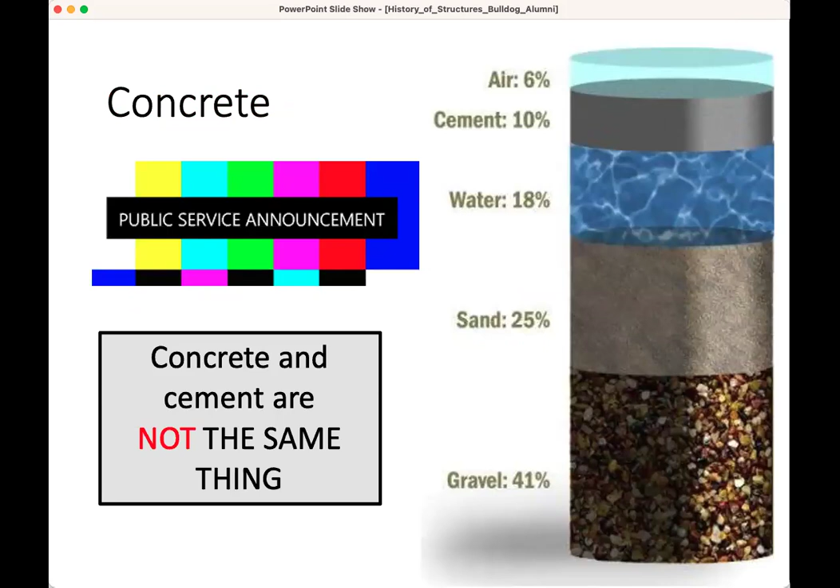So it's very important that you leave today with that fourth objective taken care of. Concrete's the hard stuff and cement's the powder. So there's not a cement sidewalk, there's a concrete sidewalk. There's a concrete slab in your basement, it's not cement. It's similar to how a cake is not just flour. So keep that one in mind and spread the word for me so I can continue on my mission with this differentiator.

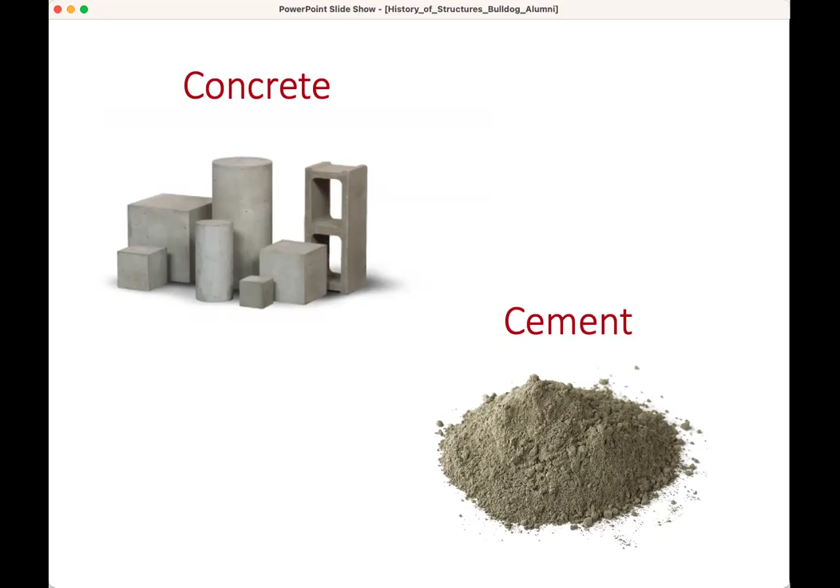So for this course, if I look at the course description in the catalog, I'll point out a few keywords: we look at structures of historical significance over a long time frame. But what's unique here is that we look at the social and economic importance, the societal impacts, and the merits of the engineering design.

I spend a bunch of the course talking about the actual structural engineers who designed and, in many cases, supervised the construction of these unique structures. Regardless of your background, you learn some basics about how load is transferred in a structure—how does the load from the cars on the bridge get down into the ground? What is that flow of forces?

Now, it's qualitative, so we don't go through a lot of numbers in this course. It's really a conceptual type of course.

And we look through many of the contemporary structural designers as well. You'd recognize some of these names, such as Eiffel, who actually did a lot of bridges before doing the Eiffel Tower. Eads, Ammann, Maillart—you may not know so many of those. But this takes us all throughout time.

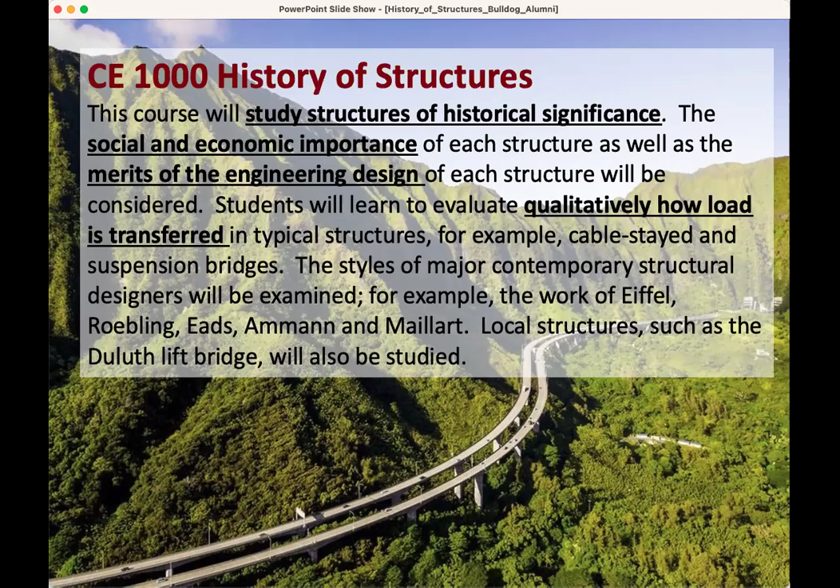But we also end up talking about some Duluth structures at the very end of the course. This course is a 1,000 level course, which means there are no prerequisites, and it's intended to be a first level course.

It's part of the liberal education curriculum, which is a little bit unusual for an engineering course. It has engineering as its backdrop and it's kind of at the core, but at the same time it contributes to the humanities and global perspectives category of liberal education.

So the humanities part is looking at the social component, the historical component, and then I jump back and forth, but start overseas in Europe. And as we develop the different structures, we move across the globe. Because we're looking at those perspectives in a global sense, it also covers the global perspectives curriculum.

This is a massive course. It's asynchronous, which just means it's go at your own pace to some extent, but we don't have live lectures. We have recorded videos, kind of like what we're doing today, that you can do at your own time. That's the asynchronous online part.

The last couple times I've taught it, I've had over 600 students from all kinds of backgrounds. The students who've had me for a class other than this one know that I tend to be really into giving you case studies and stories on the spot, so the distinct organization and rigidity of how I lay this course out is a little different than what I'm used to.

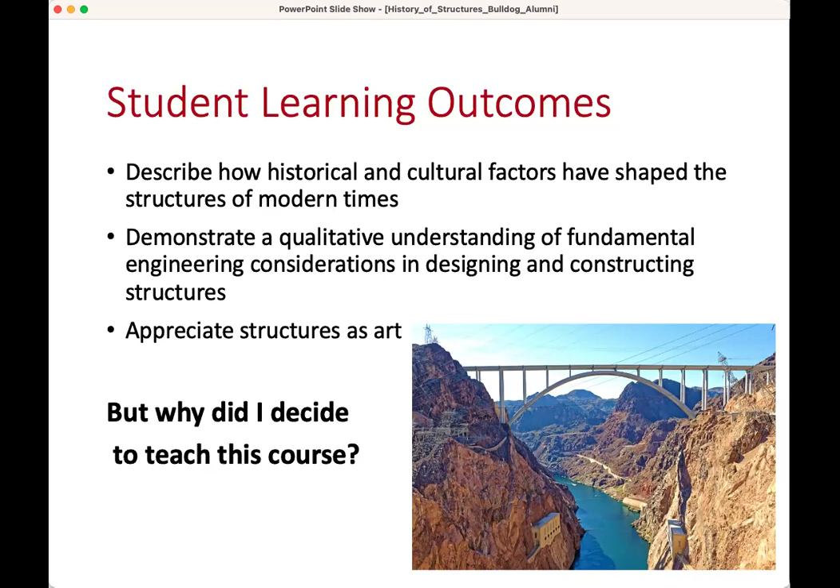And then I also was lucky to experience the person who kind of started this discussion around structural art. That's David Billington, who has passed away, but he was a professor at Princeton University. He was an engineer, but he was also fascinated by architects and architecture as well.

I was fortunate enough to be organizing a conference where he was a keynote speaker, and I had to help him set up. This was in the days of slides. He wanted 3 screens going, and he had a big long pointer stick and would smack that.

I mean, it was a stage show, and it was so exciting. It was like the dinner presentation, so it was a mixture of engineers and other audience members who weren't engineers, families and things like that. And it was just captivating.

I really wanted, first of all, to be able to do what he did as far as teaching, but I also wanted to be able to spread knowledge the way he did.

So his format has been carried on by Professor Garlock at Princeton, but in a little different way. I've developed this using some materials from David Billington and Maria Garlock, as they did an NSF project that allowed some of this to be shared. But then I've developed it quite a bit differently, based on structural engineering specifically.

I also happen to know David's daughter. She was a classmate of mine when I was a PhD student. So lots of really cool connections, and I'm honored to be able to carry on this tradition.

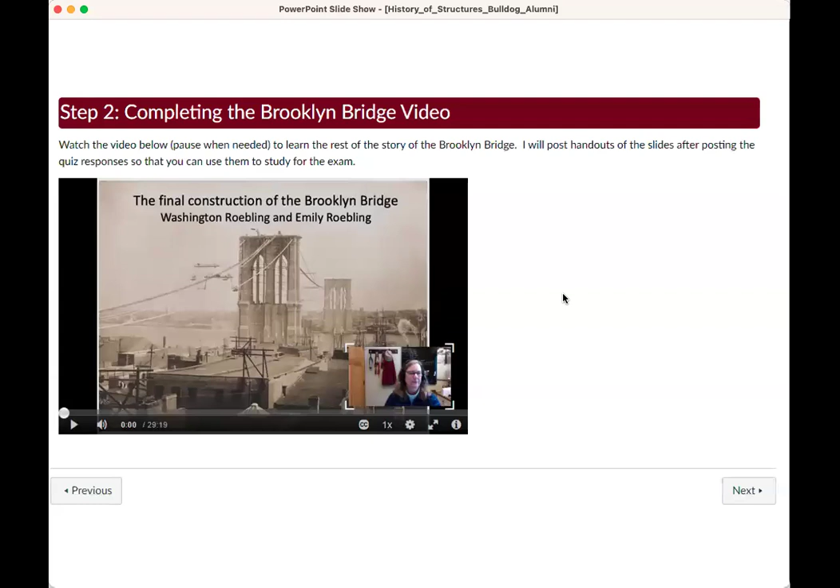You go in from there, and I'll talk to you about how I do my grading in this course right after this, but you have a kind of low stakes quiz that just tests that you watched the video and moved forward, and that you feel comfortable whether you need to go back again and see that you got all the details or not.

So, basic questions: who contributed to the design of the Brooklyn Bridge? If you've watched the video, you should have picked that up. The answer is John Roebling, Washington, and Emily Roebling. John Roebling is the one often credited, but he actually died before the bridge was completed, and his son Washington and his wife Emily had major parts in this.

Washington also was not able to go to the site after a while. Emily, and this is in the late 1800s, was on site with the construction crew many days, bringing information back and talking to Washington, who was also an engineer. John died from tetanus. He was on site with Washington one day, they were on a dock, and a boat crushed his toe; he had it amputated and then eventually died of tetanus.

So Emily actually did a lot of the work on this bridge, making it happen. Going down to the construction site in the 1880s as Emily Roebling is a huge deal - that was still a huge deal when I was in school, to be honest. This is part of this really cool people story behind the Brooklyn Bridge, as well as talking about what that did for New York City, what the landscape looked like at the time.

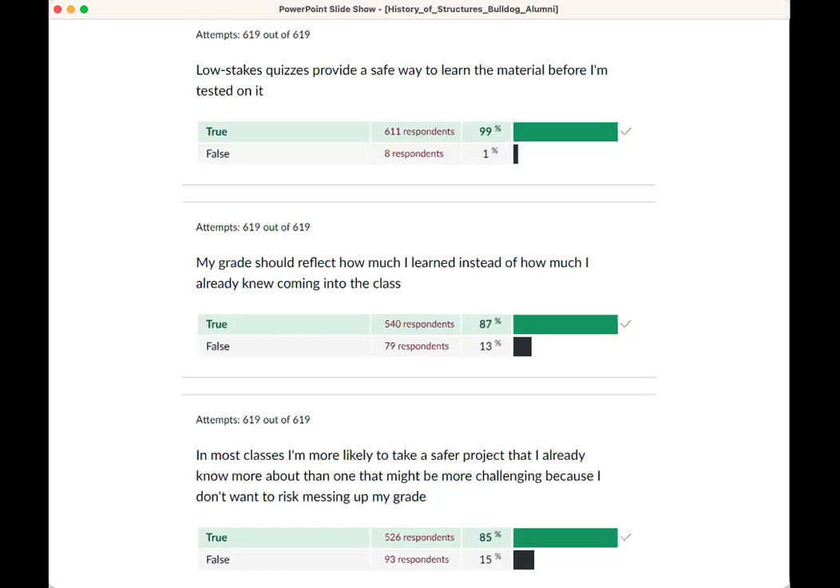This is an overall survey I don't prep them for. They take it at the end along with their teaching surveys, and I just ask what they think of this method. You can be pessimistic and say they just like it because if they do all the work they get a decent grade, but they actually have to learn the material to do well on the summative pieces. You were able to take these quizzes many times.

99% of the class said this was a low stress way for me to learn and reinforce the material that was important. I learned more this way than if I'd been focused on high stakes quizzes with one try. I worry less about the background that others have coming into the class. So it's kind of an interesting sample.

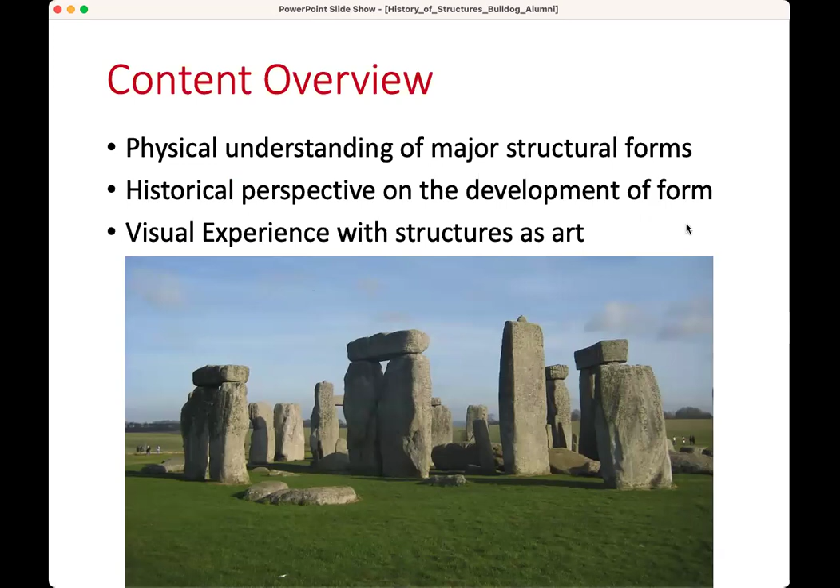Let's talk about the content of this course. It's designed so we go through physical understanding of the big structural forms, a historical perspective on how we got there, and then a visual experience with structures as art. This is Stonehenge.

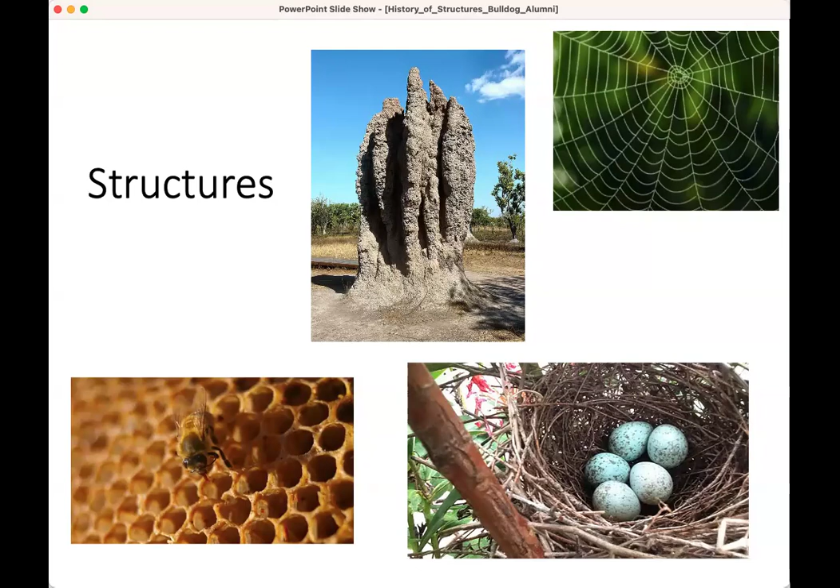We have structures in nature that we replicate - you can see the honeycomb pattern and various structures, some very intricate. Then we have man-made structures, sometimes based on those types of things. I'm not going to go through and tell you what all these are - if you're in the class, you'll see each of these and we'll talk about them.

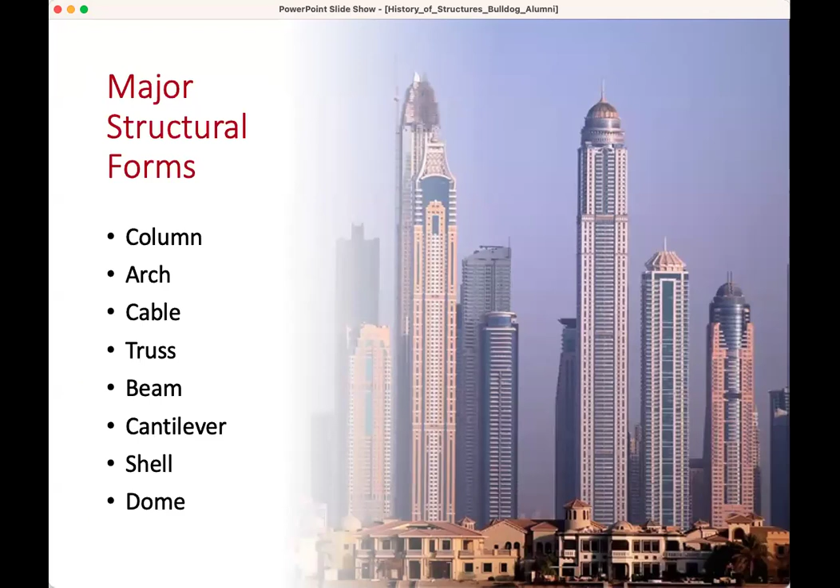We talk about major structural forms, everything from columns and arches and trusses to shells and domes. I'm just going to flick through a couple of these. In the course, we spend time going through these structural forms, and I'll show them in order of how complex they are.

Cables are the opposite - they take all tension, all pull. They're very effective by pulling; try to compress a cable and it turns into a wet noodle basically. The top image is a suspension bridge, bottom left is a cable stayed bridge, bottom right is a ribbon structure - might be scary for those who don't like heights. They're all based on these big tension carrying members, whether that's the big suspension cable, the direct cables to the roadway, or the ribbon holding up this reverse arch looking structure in tension.

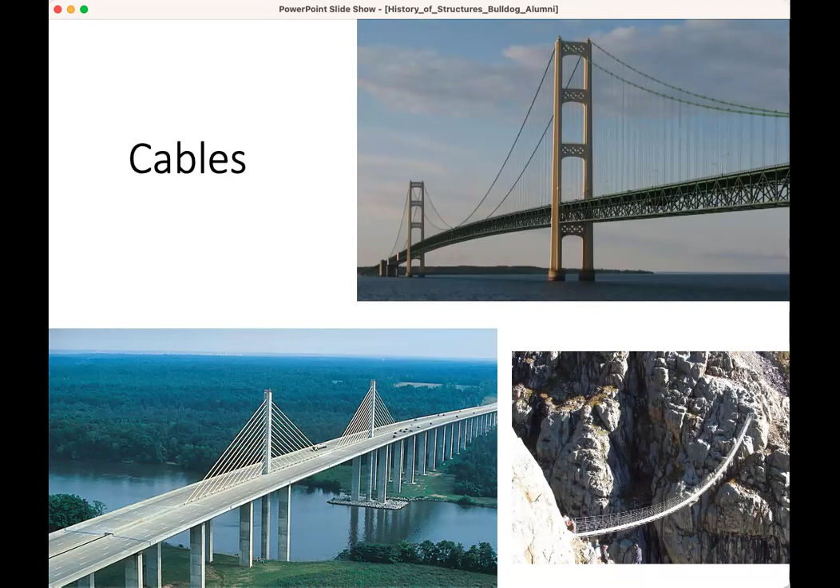Trusses are the next step. No matter how complex, something like a cable-stay bridge or suspension bridge looks, if I'm looking at the primary tension component, that cable part is simple because it's just tension. Trusses are made up of tension and compression members, some of each, and they work together to take bending.

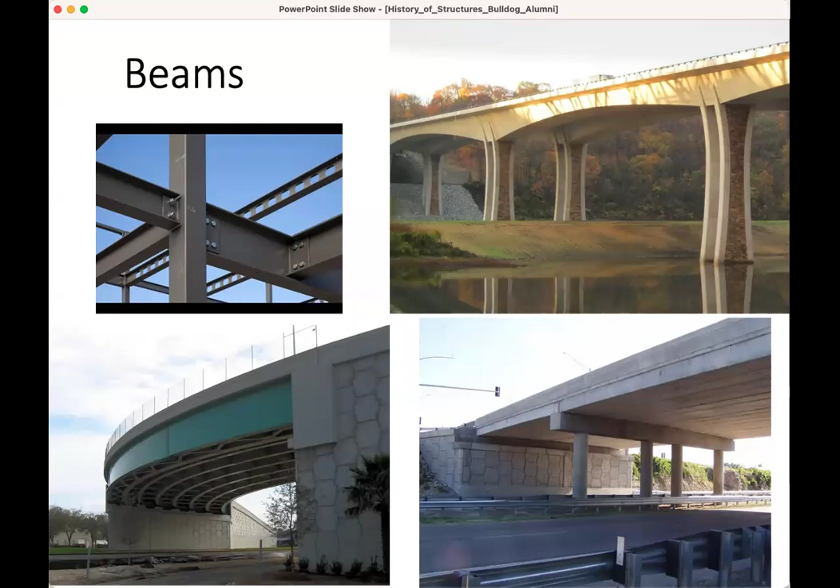Beams are more complex because they take all those different things, including flexure or bending. There's all different kinds of beams. Cantilevers, in other words diving boards, are a specific type of beam where we've got tension on the top, compression on the bottom, and it's a favorite of architects.

Shells are very complex, so they kind of work with a whole membrane. These shells are all concrete, very thin concrete shells, so really amazing what can be done here.

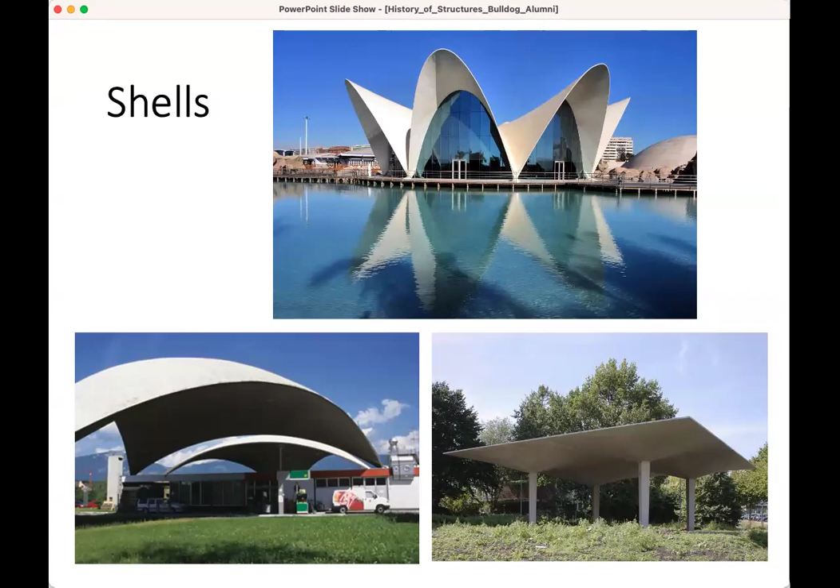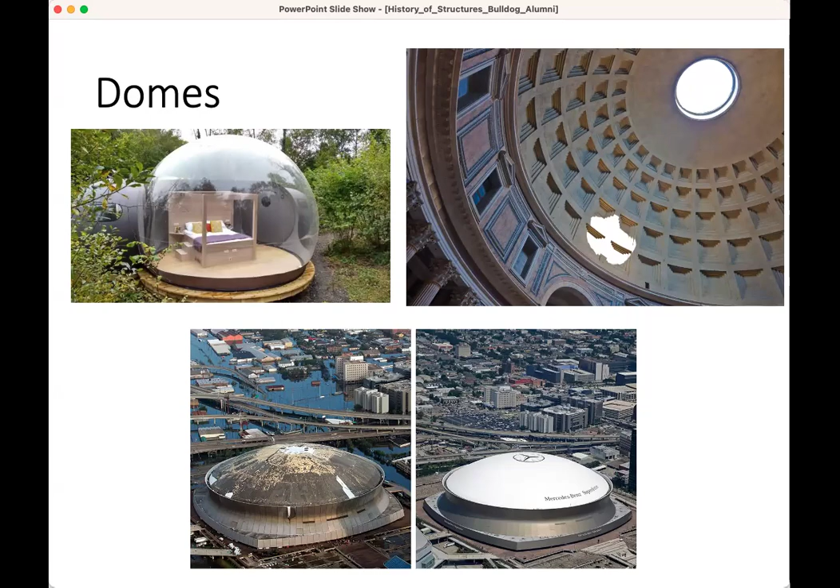Domes are a specialized version, so the Pantheon, upper right. The Superdome, of course, I talk with the students about—the Superdome on the left is after Hurricane Katrina.

So we got the structural piece. We also have the materials piece. And what I do in this class is walk through time. I go from Stonehenge, quickly move into a discussion on timber and stone, quickly into iron.

And then we start looking at the more modern evolution. So we're following time, jumping at different spots around the world, and developing our different structural shapes by touching on key structures. Maybe not the most famous—we have plenty of famous ones—but these are ones that have a story to tell about the person who designed them, the time period, the location, and the societal impact.

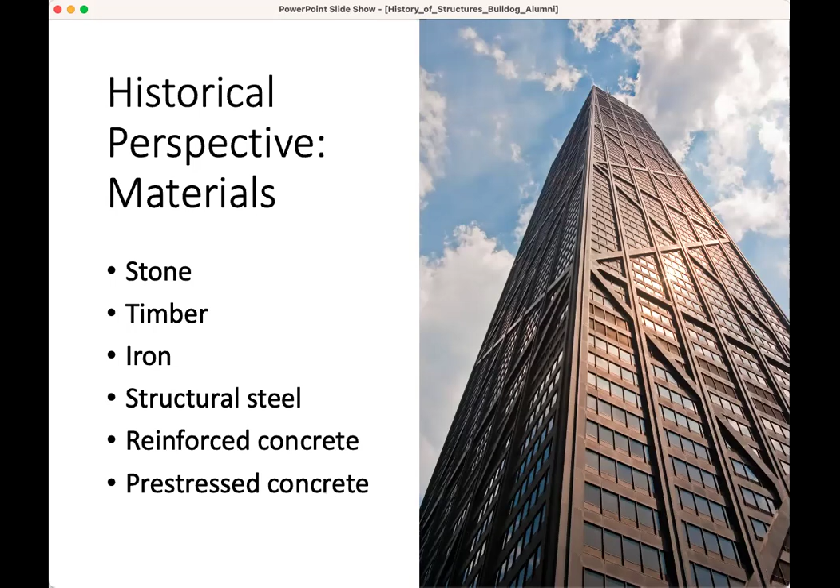And so as I move through time, I have these materials developing, I have the structural forms developing based on what the materials can handle, and I start to see a great evolution here.

For instance, we start out just past the Industrial Revolution. I used to be using stone and wood. Now, all of a sudden, I have iron. Iron as a metal is a game changer for what I can do with my structures and how big I can span. Stonehenge doesn't span very far. Some of the iron structures do.

I have a change in power source from animals and humans to steam engine, so I've also got bigger load demands for bridges and things like this. I start to open up my experience—I'm not just looking at a mile around where I live, I'm starting to connect cities at this point.

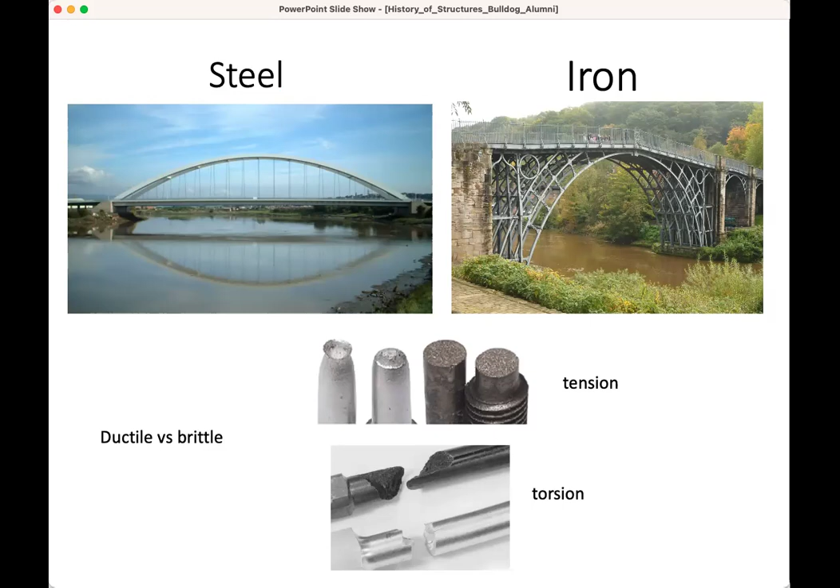I go from iron to steel, which is an alloy, and I start to get properties like more ductility, more ability to stretch and be flexible and not fail instantaneously. Some really important properties. I start to put steel inside of concrete so that it takes both tension and compression well.

I then start to use the steel almost like a steel rubber band—it actively compresses the concrete and I get longer and longer spans. This is my specialty area, in pre-stressed concrete.

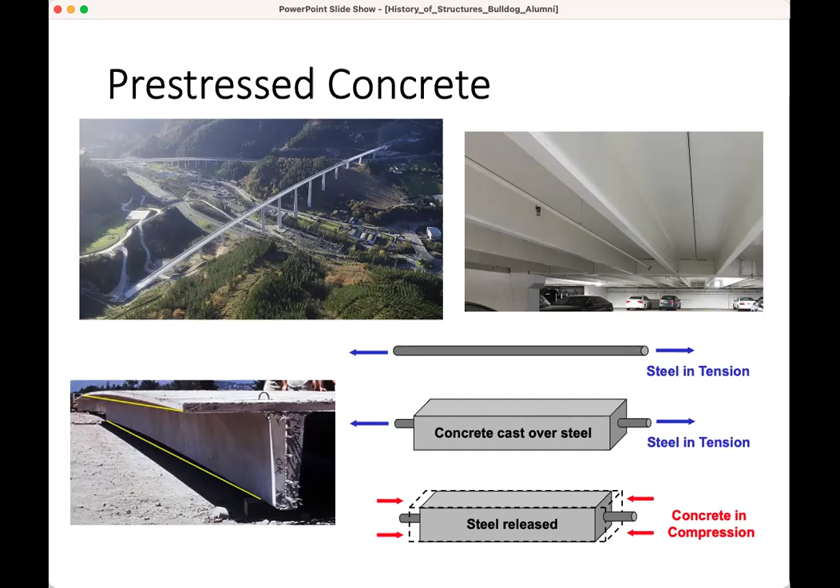So if I'm taking this as an engineer in design, this is a graduate class or a senior class. But if I'm talking about it conceptually, I can talk about it in this type of base-level class.

New materials: there's composites, there's new low-CO2 type cements, there's 3D printing. And the question is, what's going to stay? What has staying power? What's a fad? What's maybe not as practical at full scale?

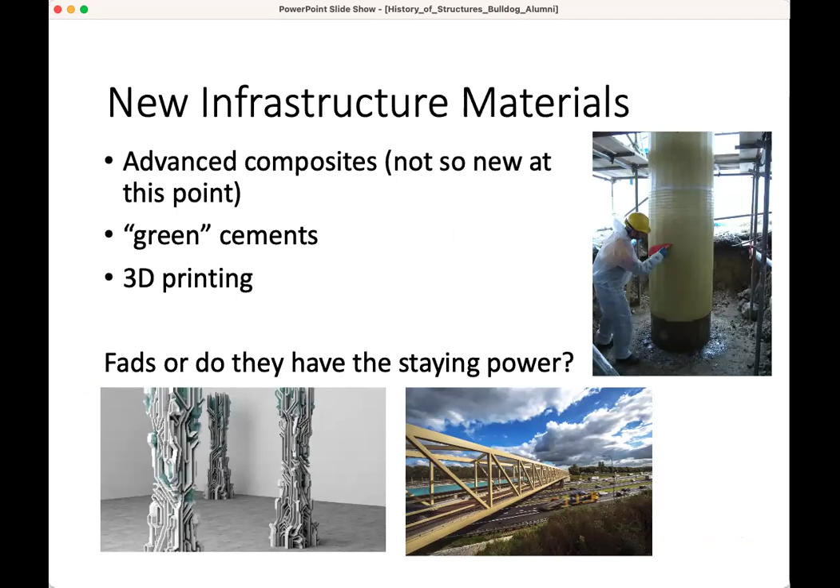Now, there's consequences when we move and we have progress. There's also an inherent risk in that.

This is the Quebec Bridge from 1907. As it was nearing completion, it completely collapsed, killing 88 people. There were two failures actually during this time. It took 30 years to complete. The lives lost here were the construction crew.

Many structural failures happen during construction. It's one of the hardest, most unknown loads during that time.

The reason this one is really important is this is the first time we knew enough and had engineering background to not just do trial and error. We knew how to do calculations, and the calculations—they forgot to include a change that meant this bridge couldn't hold its own weight. So this was a calculation error.

The myth is, and it turns out it's a myth, although I like this story, that the first engineering rings were made from this bridge.

So we have a ring ceremony where our graduating engineers get a metal ring to wear on the pinky finger of their writing hand, which is supposed to remind you about the importance of the life safety piece of our profession.

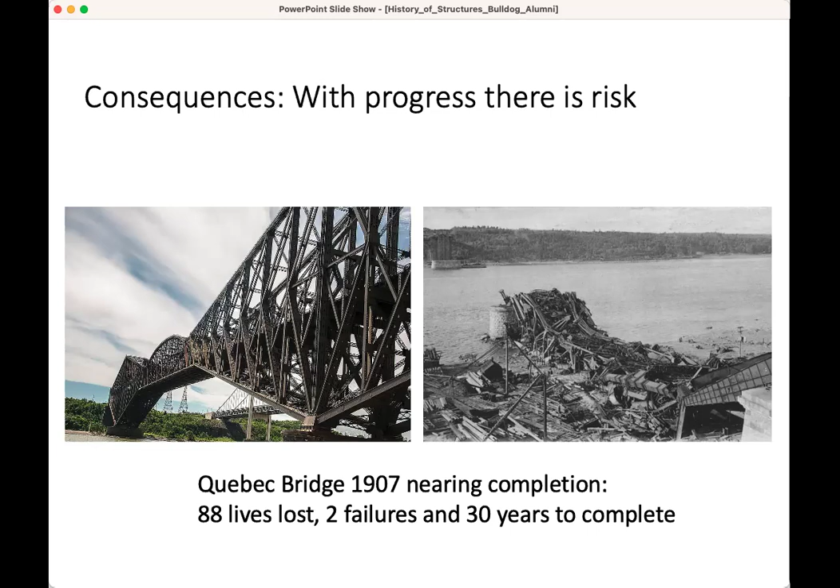The modern structural engineer has a lot of tools at our disposal. We aren't doing just trial and error. We have calculations we're taught so we can predict performance. Ideally, we have field experience to look at new and innovative construction processes, and we have imagination to look at new forms. The original structural artists went from imitating things that worked, slowly improving on those, trying it out, to innovation, and finally becoming inspiring. It's a whole process, and it's as much an art form in many cases as it is just what you might think of as the pencil-pushing engineer.

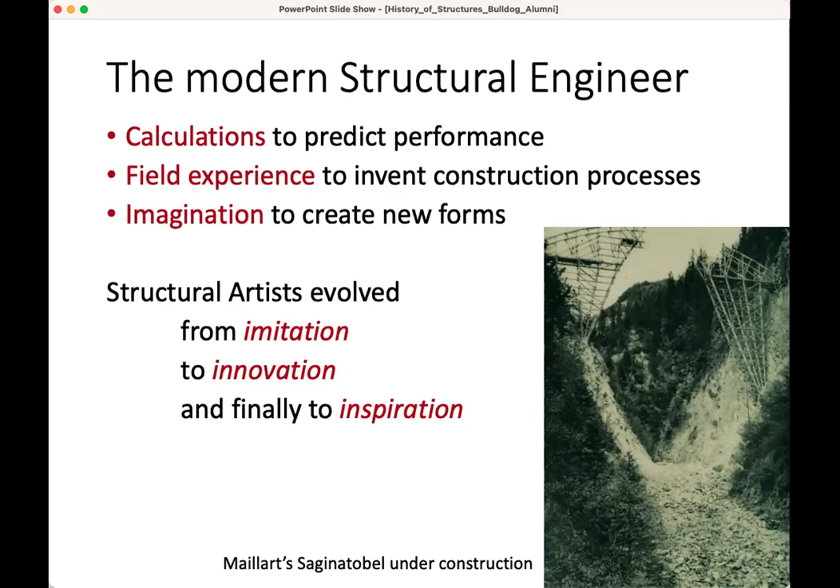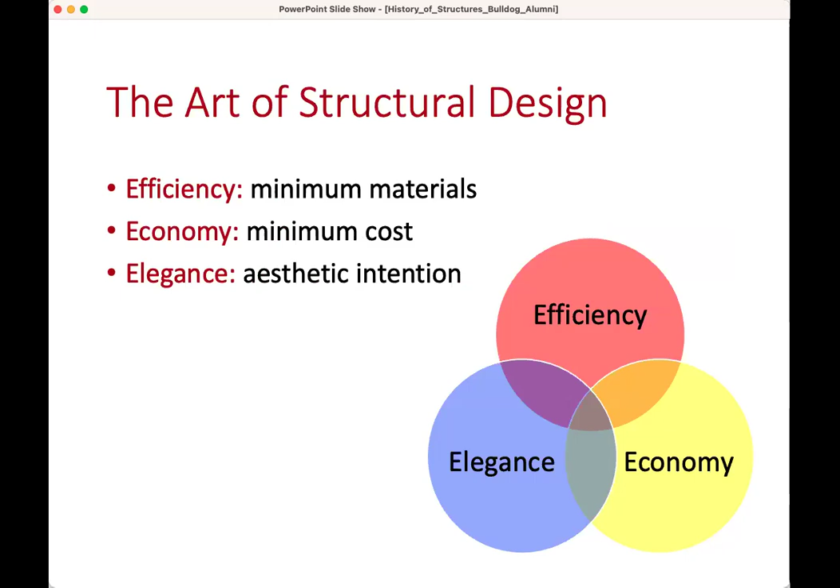One of the things I cover a lot in this class is the art of structural design. It means it's efficient, it's economic, and it's elegant. So it's not all about the looks—it should have form and function. We talk a lot about evaluating a structure on all three of these.

I'm going to wrap up soon, but I want to give you a real quick sample of a bridge that might be covered in our class and how I talk about the social and other aspects here.

This is the Firth of Forth Bridge. It's a heavy duty one in Scotland. If you're ever there, this is a great one to visit. There's a cable stay bridge right next to it, so it's a pretty cool area.

This shows you how I would introduce this to the students. We would have gone through all these other bridges, and I'm hopping back and forth from what's happening on this timeline in the United States with Roebling, while also looking at many other bridges around England and France. Most of these are in England and France. So this particular lecture, I talk both about the Eads Bridge in St. Louis, and the Firth of Forth Bridge, which is a 1,700-foot main span in the late 1800s by Baker.

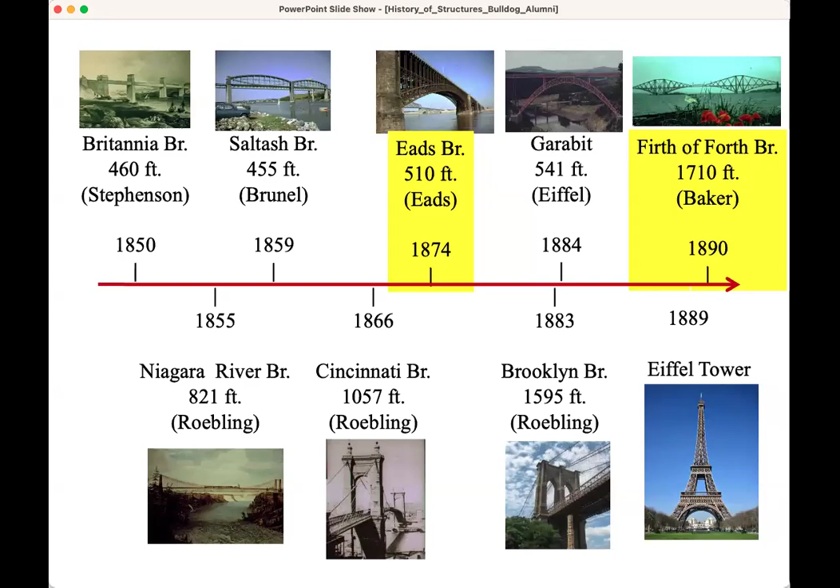Briefly, one of the things that influenced this bridge—this really hefty looking, pretty unique thing—what influences that bridge? Well, it wasn't just that it came out of the blue. At the Firth of Tay, where this bridge is, there was a disaster in 1879 that completely wiped out the bridge. When you have a bridge failure—let's talk about the Baltimore Bridge, for instance, the bridge in Baltimore that was hit—you'll know that the next bridge is going to look pretty strong, stronger than it probably needs to be, honestly, because public opinion is that's scary, like a bridge could fall down.

So here's what we get when we take that extreme. This particular view is really massive. From the side, it looks a bit better. And I said it's next to a cable stay—it's a suspension bridge, you can see it in the background. So here's the Firth of Forth Bridge.

Just briefly, the scientific piece I'm going to show you—the social piece is really in response to what the public needs to feel safe to continue to cross this passageway. And then there's a symbolic piece with the visual perspectives. If I look at the picture I have here, it's a very different view. If I look at it completely side-on, it is a fairly elegant and more slender looking bridge.

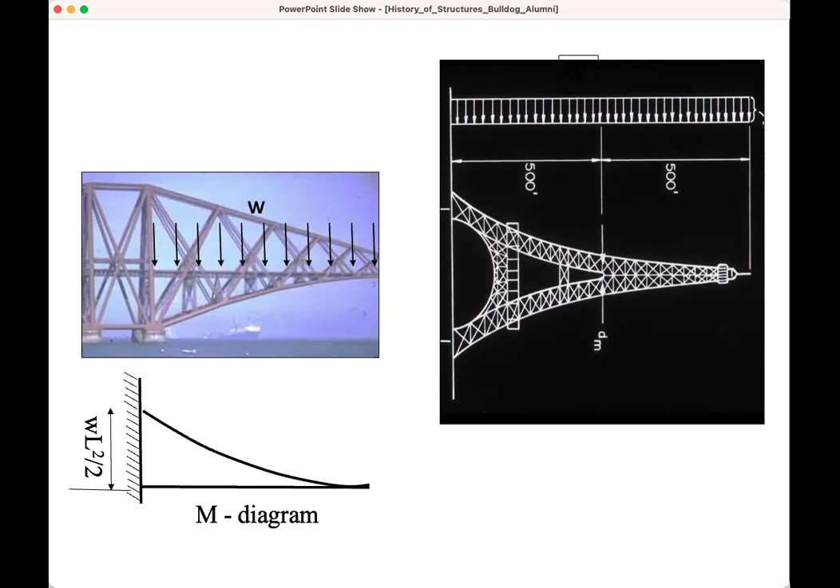Without going into detail, some of the structural pieces you might find is that's the Eiffel Tower on the right there on its side—it gets wind load. This bridge, the edge spans look a lot like an Eiffel Tower on its side, and instead of wind load, this is our weight from the cars or the trains or its own self weight, and it follows the stresses that are in the bridge. This obviously takes a lot longer to explain, but it's something we'd go through in the class, and at this point I would have already talked about this with the Eiffel Tower.

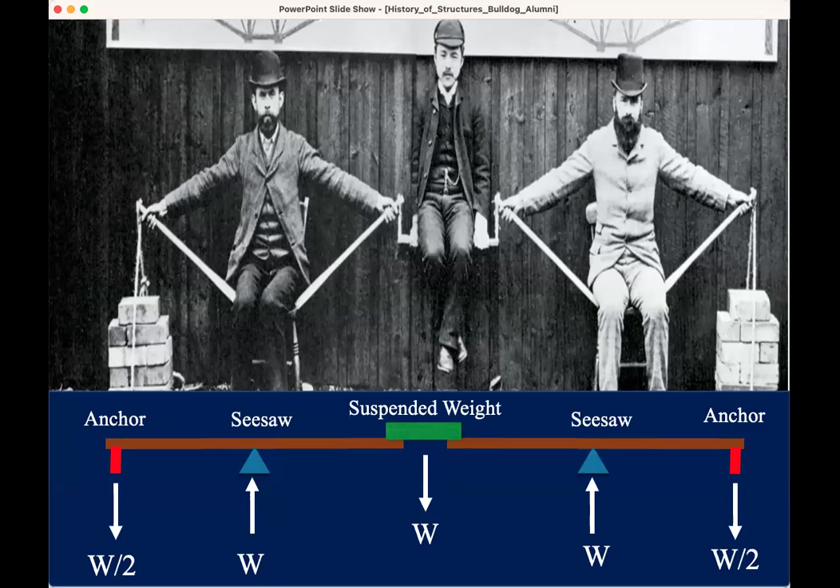This is that scientific piece. This is a really unique bridge. When Baker was trying to show this to people to make them confident about how this would work, he had a demo with a couple guys who sat there and were able to suspend the middle guy, because without going into detail, the forces going up have to equal the forces going down. The main span is completely supported by those two edge spans in a way that is very efficient and effective. Okay, I'm going to wrap up because we need to have some time for questions.

I'll leave with a quote by Hardy Cross, who is an engineer: strength is essential, but otherwise unimportant. So when we think about this, this is a real piece of the artistic, the social, the economic, all the impacts we have in structures beyond just the fact that they're safe and they stand up.